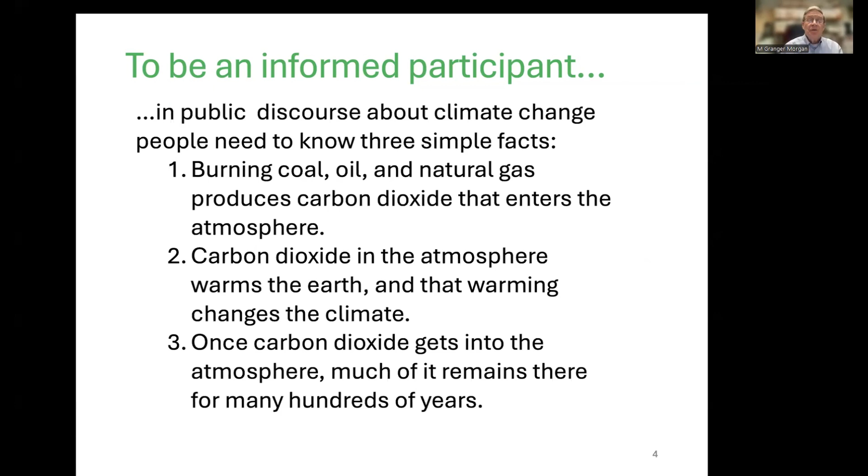Now, to be an informed participant in public discourse about climate change, people basically need to know just three simple facts. Burning coal, oil, and natural gas produces carbon dioxide that enters the atmosphere. Once carbon dioxide gets in the atmosphere, it warms the earth, and that warming changes the climate. And once carbon dioxide gets into the atmosphere, much of it remains there for many hundreds of years.

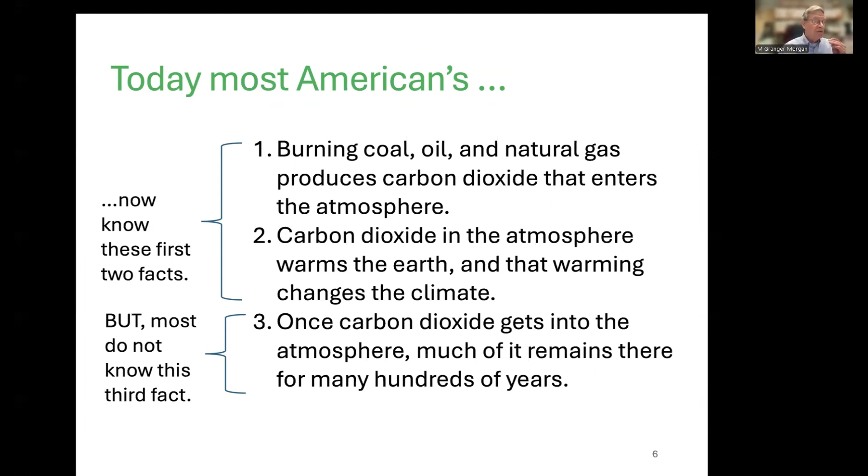Now, with a number of my social science colleagues, I first started studying what people know about climate and climate change about 30 years ago. And it turns out that now most Americans know those two first facts that I listed. But it also turns out that most Americans do not know this third fact, namely that once the carbon dioxide gets into the atmosphere, much of it stays there for many years.

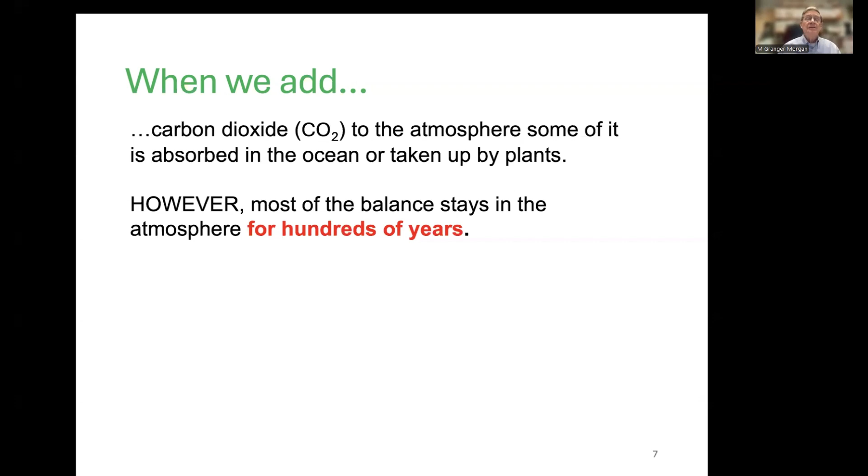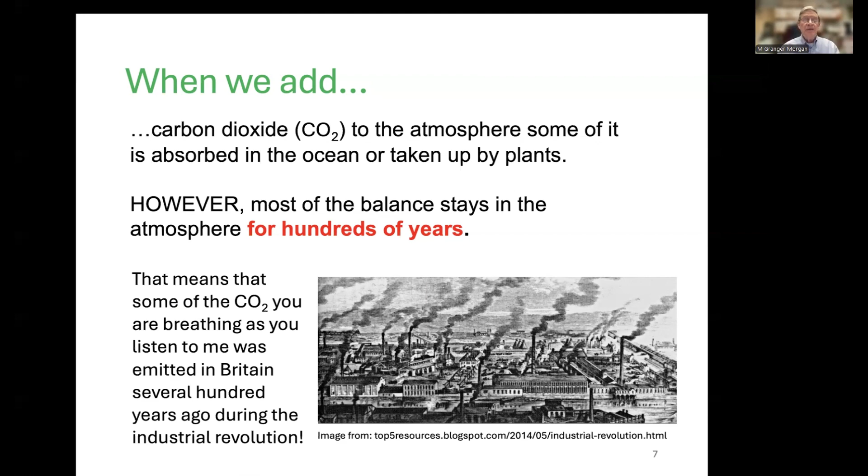So when we add carbon dioxide to the atmosphere, some of it gets absorbed in the ocean or is taken up by plants. But as I said, most of the balance stays in the atmosphere for hundreds of years, which means that some of the CO2 you are breathing, as you listen to me, was emitted in Britain several hundred years ago during the Industrial Revolution.

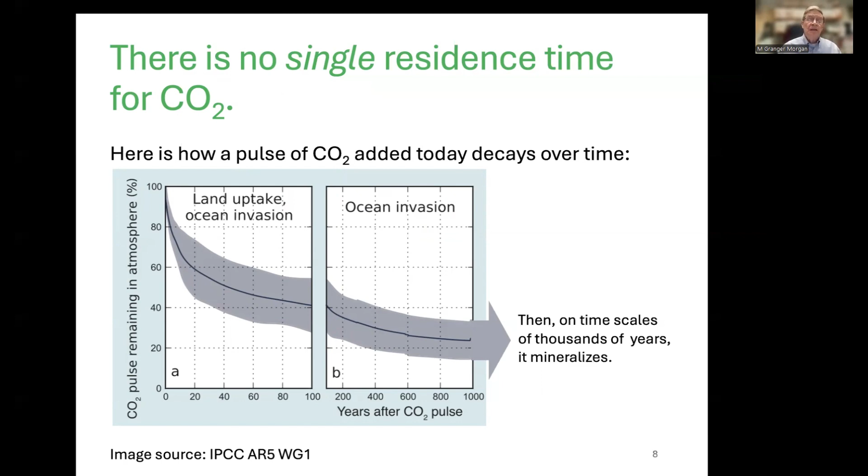So there's no single residence time for carbon dioxide. Here's a plot of how a pulse of CO2 added today decays over time. And you can see that after 100 years, it's down to maybe about 40%, but a lot of it is still around. Most people think that CO2 stays in the atmosphere about as long as conventional air pollution.

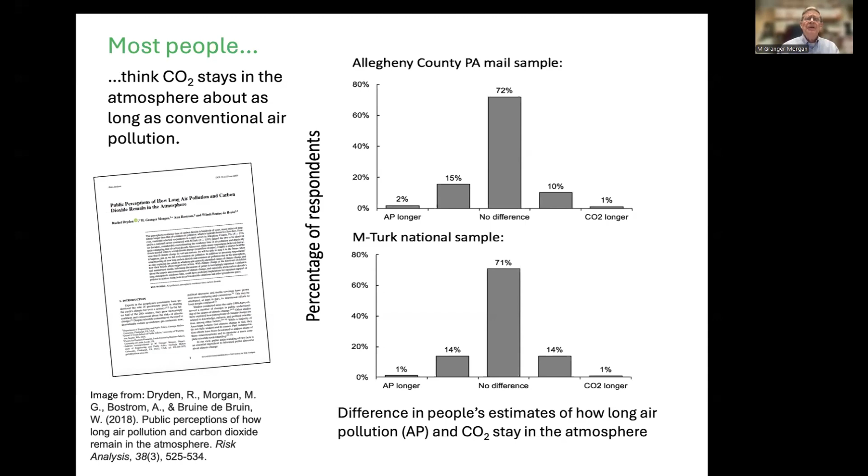To help you think about that, a simple bathtub model can help. Consider the figure on the left, which is the case for regular air pollution. I've got this tap, which is air pollution going into the atmosphere. The atmosphere is the bathtub. And in this case, there's a large drain, and it pretty much drains out at the same rate that I'm putting it in.

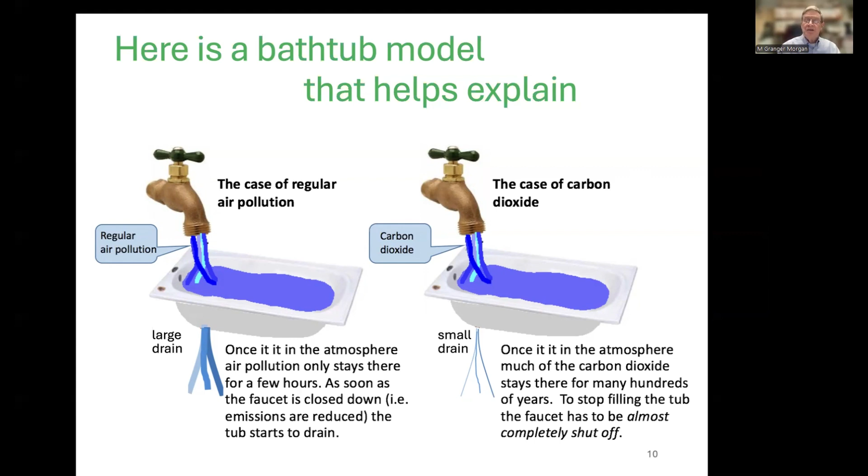The figure on the right, on the other hand, is the case of carbon dioxide. Still, we're putting a lot into the bathtub, but the drain, that is, the processes that can remove carbon dioxide from the atmosphere, are much slower. And to stop filling the tub, the faucet has to be almost completely turned off.

So here's the bottom line on that first part of the talk. We can argue about how fast we should reduce our emissions of carbon dioxide and other greenhouse gases, how best to make the trade-off between incurring inconvenience and cost today versus leaving a habitable world for our children tomorrow, but neither proceeding full steam ahead with business as usual, pretending there's no problem of climate change, which appears to be the new policy of the U.S. government, nor going along with policy because folks figure that in a few years, when things get really bad, we'll just fix the problem. Neither of those is going to work.

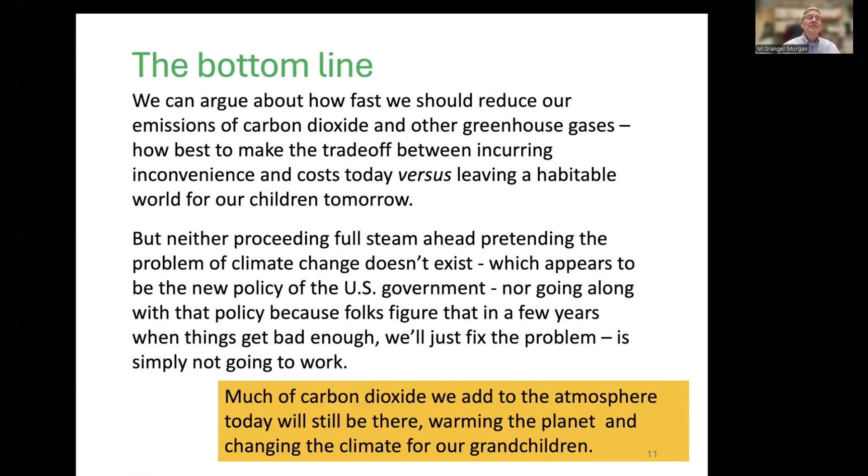All right, so let me move up. Oops, I'm going in the wrong direction. Sorry.

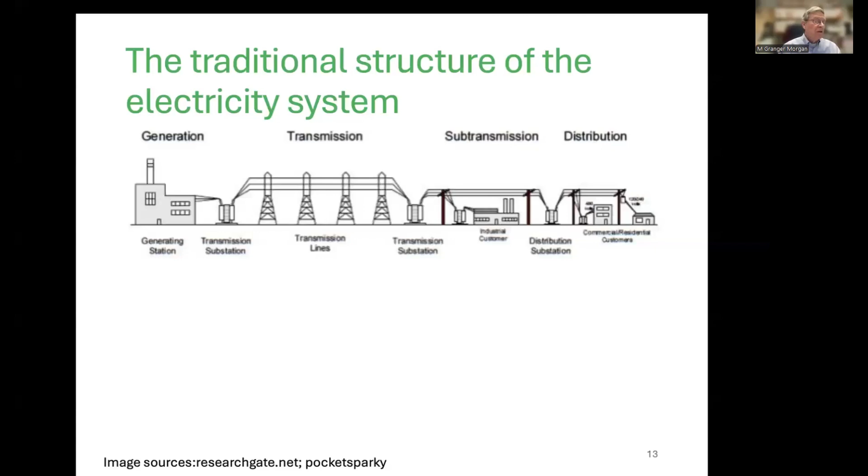So let me now say also a few background things about the electricity system. The traditional structure of the electricity system looks pretty much like this. We had large central plants. We moved power out across the countryside in high voltage transmission lines. We stepped the voltage down and distributed it to things like factories. We step it down further and distribute it to communities, and ultimately we step it down for use in our homes.

Three things to note. There are three conductors, that is three wires on these transmission lines, because we use three-phase alternating current. That's much more efficient for long distance transmission and for many heavy loads like big motors.

The second thing to note is that we use high voltage for long distance transmission because the amount of power that you move through a power line is roughly the product of the voltage and the current, but the losses go as the square of the current. So you want to move the power with low losses, which means you want to keep the current low, which means you want to keep the voltage high.

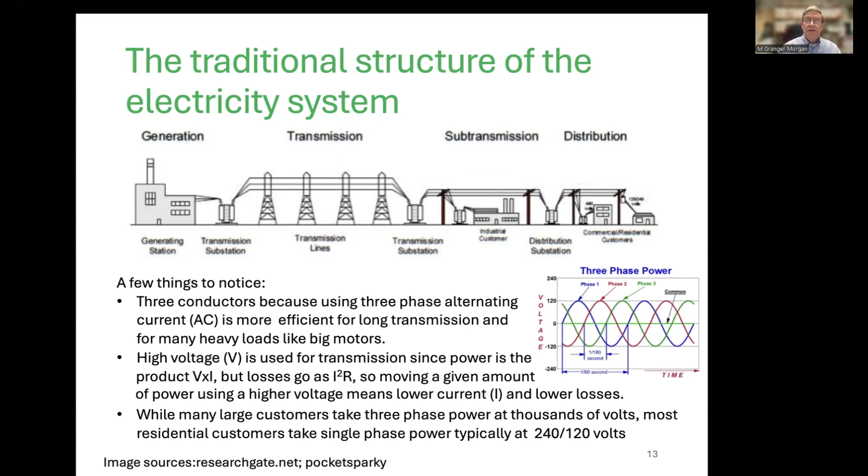And then finally, while many large customers take three-phase power at thousands of volts, most of us as residential customers take single-phase power, typically at 240 or 120 volts.

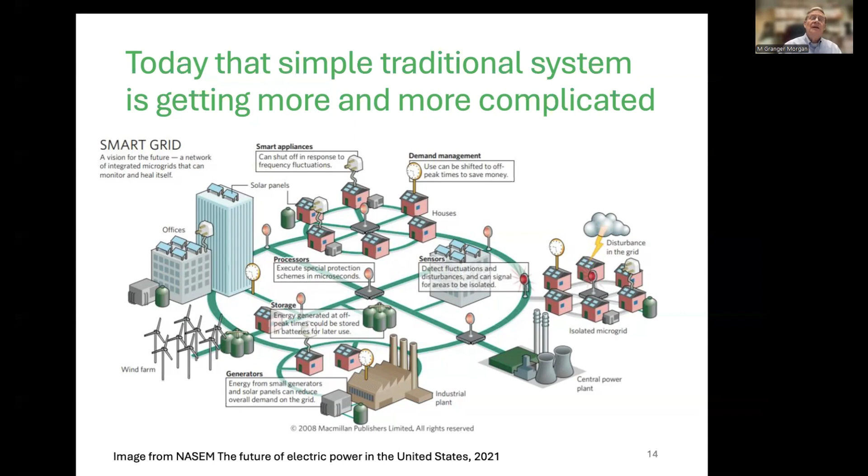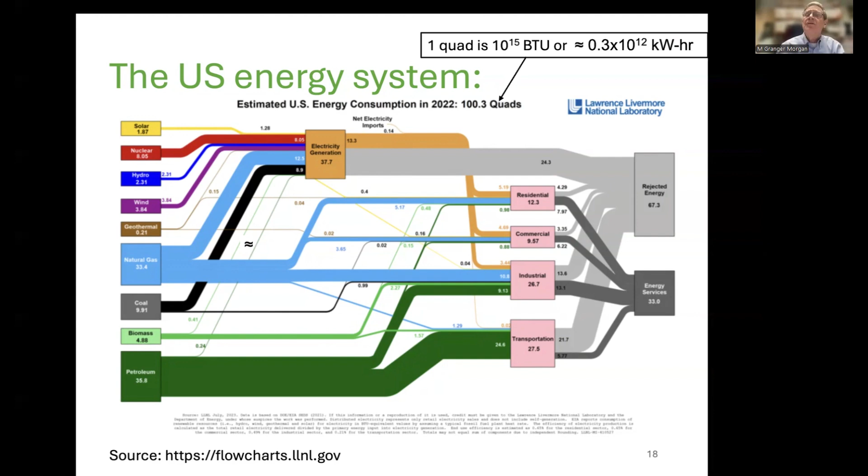Now, suppose I want to limit carbon dioxide emissions. Incidentally, these are all in quads, which are a funny unit, but basically there are three strategies. We can use more generation that doesn't produce CO2, things like wind and nuclear and solar. We can be careful to not let the CO2 get into the atmosphere when we burn fossil fuels. And we can use electricity that we generate more efficiently so we don't need as much of it. I'll talk first about that last one and then the others.

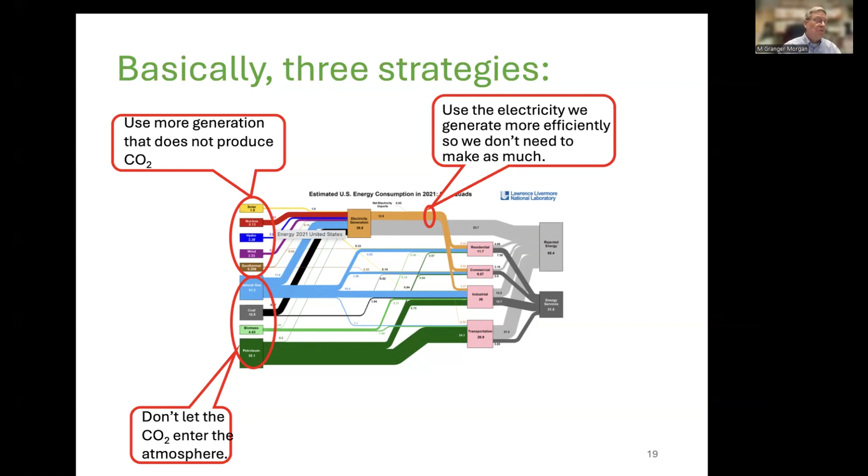Here, I'm going to show you 4 examples of using electricity more efficiently, and I'm going to spend the bulk of the time on this first plot.

This is a plot for refrigerators. The top dark curve is the size of refrigerators. So you can see refrigerators today are bigger than they ever were. The middle blue curve that goes up and then comes down is the amount of energy, the amount of electricity that refrigerators use. And you can see that beginning in the 70s, first because of standards implemented in California, and then because of national standards, the energy used to run a refrigerator has continued to drop.

And furthermore, the bottom lighter curve is the price of a refrigerator. And so you can see that today, or at least when this curve was done, but the situation continues today, as a result of regulation that says you can't market an energy inefficient refrigerator, refrigerators are larger, cost less, and use less energy than ever before.

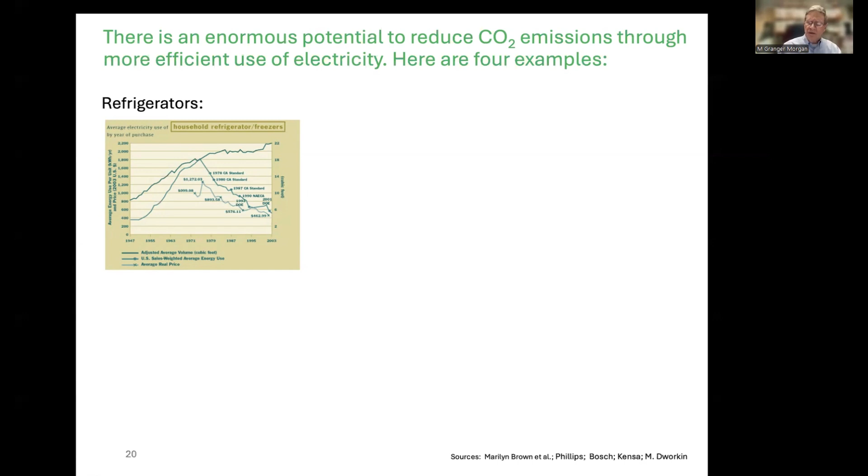There are other things that we can do as well to use electricity more efficiently. We can use heat pumps. We can convert to solid state lighting. Most of the country has now. And then there are strategies such as the system efficiency Vermont has implemented.

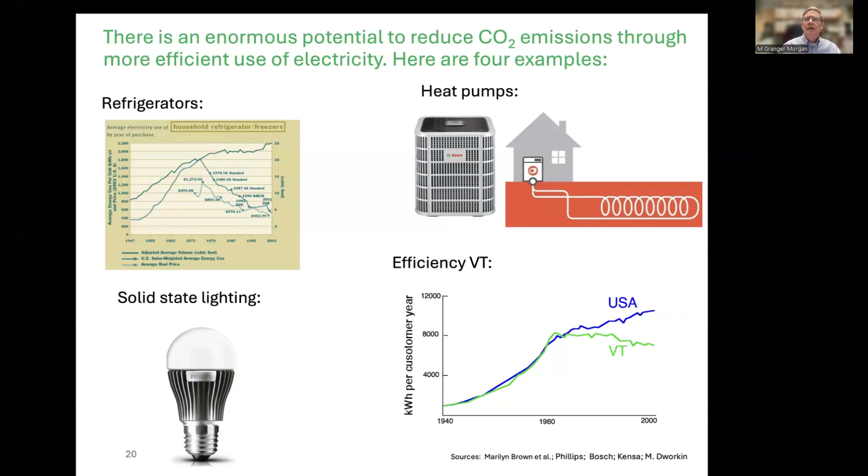Vermont, this is the kilowatt hours per customer year in Vermont. And for the US, it in recent years has been growing at sort of a linear rate. It's beginning to pick up a bit more now. The green curve, though, you can see for Vermont is because Vermont takes a few mils of price off each kilowatt hour sold and asks, how could we use this money to better improve the efficiency with which we use electricity in Vermont?

So here's how the U.S. generates its electricity today. You can see that up until the late 2000s, coal was the dominant source. But coal has been dropping off and natural gas has been picking up. That's largely driven by economics. Gas has really gotten quite cheap, as I'll say on the next slide. Nuclear has been running about 20%. It's actually dropping a little bit because our nuclear plants are getting old.

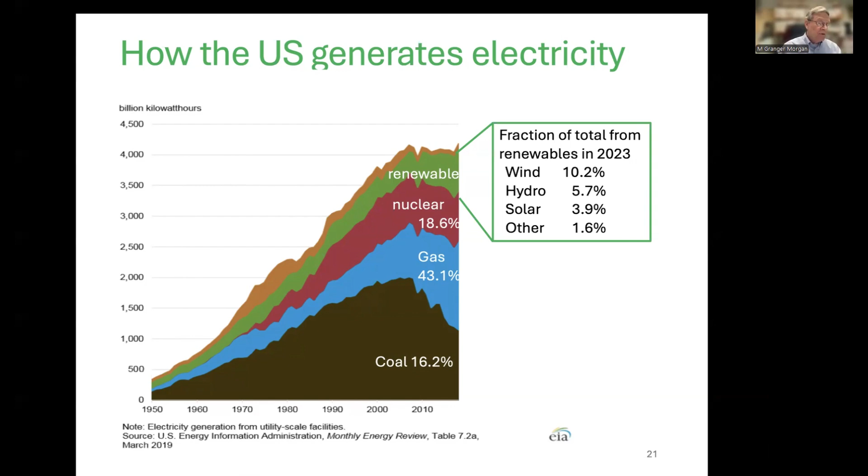And here's renewables. Wind is about 10% of total generation. Hydro is of the order of 6%. Solar has been growing, but it's still only about 4%. And so the switch to natural gas that I mentioned in the early 2000s occurred because of the so-called shale gas revolution. Gas prices fell dramatically. Producing electricity with gas produces only about half as much CO2 as using coal.

And so some have described that switch to gas as the bridge to a decarbonized electricity system, which is great. I mean, the fact that we've dropped the carbon intensity of electricity generation by roughly half is a wonderful development. But a bridge needs an abutment at the far end, and so far not much has been done to build that. We've got lots of coal and gas, and while wind and solar should play a much bigger role, we're not likely to be able to completely decarbonize the electricity system by just using renewables.

And that means we need to find ways to use gas and perhaps a bit of coal while not releasing carbon dioxide to the atmosphere. And there are basically three ways to do this. When you download these slides, you can look at them in greater detail. The top way basically says use the fuel in a power plant and then scrub the CO2 out of the exhaust stream of the plant.

Now, that's very energy inefficient because most of the exhaust that comes out of a power plant is nitrogen because the atmosphere is mainly nitrogen. And so there's not a whole lot of carbon dioxide in that exhaust stream. The concentration is low. So you really have to work hard to scrub the CO2 out of the exhaust stream. But we're doing it. It's in some plants, and I'll explain that in a moment.

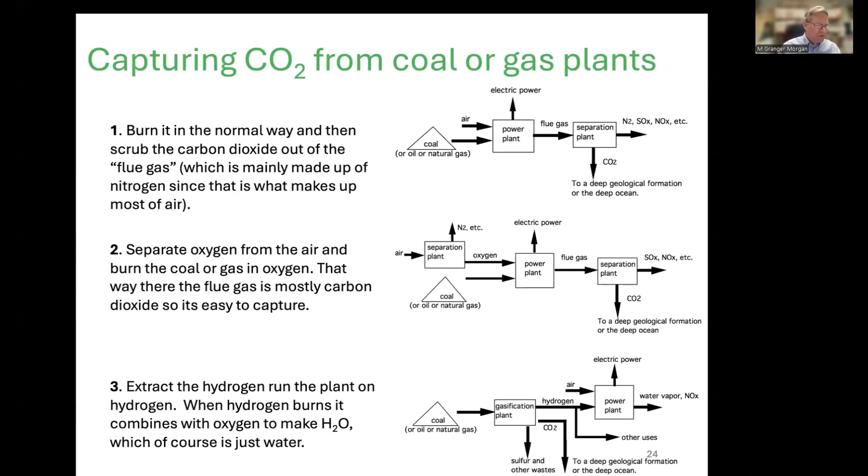The second thing you could do is you could simply break up the atmosphere composition and get pure oxygen. You do the separation before rather than after, and then burn the fossil fuel in pure oxygen. That means you get a much more concentrated stream of CO2 out the back end. And the third strategy, you gasify the fossil fuel, you make hydrogen, which of course, when you combust it with air, with oxygen, makes just water. You do have problems. You have to worry a bit about nitrogen pollutants. So these ideas are not just pie in the sky.

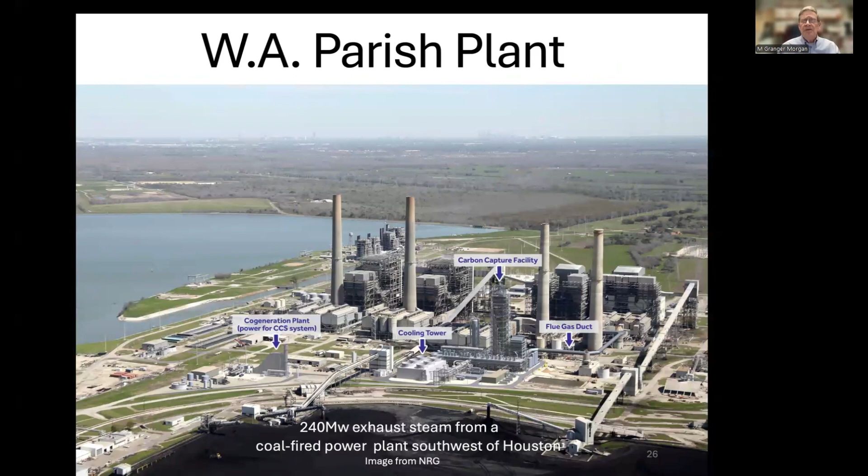Here's a power plant in Texas that's actually doing this. Once you've separated the carbon dioxide, of course, then you have to get rid of it. And basically, the strategy is to inject it into appropriate geologic formations where it will be permanently sequestered at depths of 1 kilometer or so. It rather quickly becomes trapped in the pores, so the risks of any escaping, if they're done properly, are really quite modest.

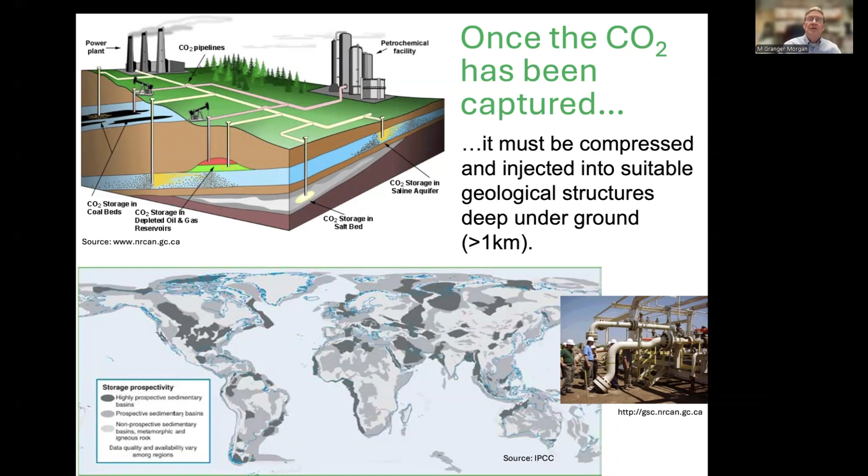And you can see that North America is very fortunate. Both we and the Canadians have quite a lot of appropriate geologic formations. Now, for a long time now, since 1996, in Norway, we've been doing this. The Norwegians passed a rule years ago that said, in your offshore operations that produce natural gas, you can't emit carbon dioxide. And so natural gas in the fields that the Norwegians extract from often is intermixed with carbon dioxide.

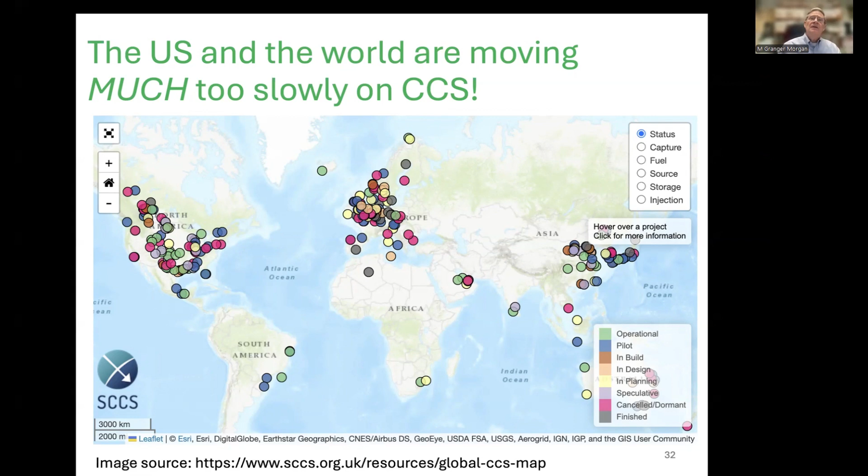Now, the U.S. and the world has been moving way too slowly on this. There are a few plants around. Many of them are pilots. But nevertheless, if we're going to use this technology, we really need to build more plants at commercial scale.

Now, today, about 40% of U.S. electricity is generated carbon-free. And as I said before, about 20%, actually it's been shrinking a little bit, comes from nuclear. I'll mention that in a moment. About 10% from wind and about 3% or 4% from solar. To fully decarbonize by 2035, we'll need to build about 55 gigawatts of new carbon-free electricity every year.

And although the U.S. built 60 gigawatts of natural gas generation per year in 1999 and 2000, it has not built more than 15 gigawatts of renewables in any single year. We could do it, but it's going to take a big push. So let me have one slide now on wind, one on solar, and one on nuclear.

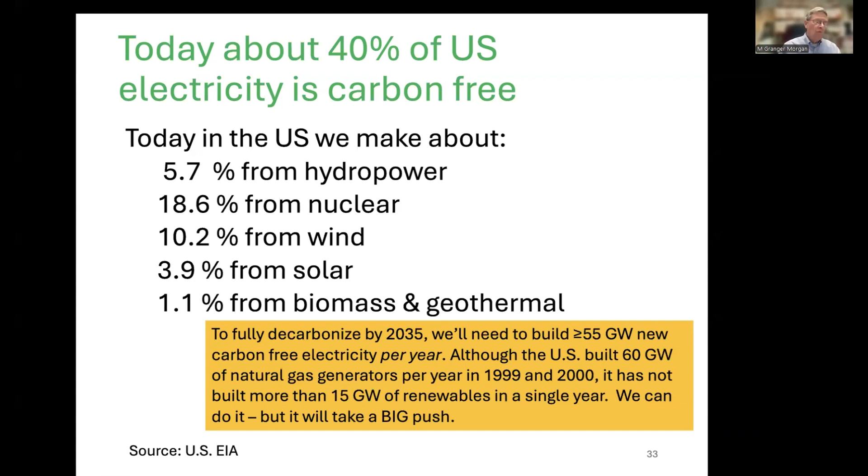If you happen to be in a place where you've got a lot of hydropower, hydroelectric dams, like the Pacific Northwest or Scandinavia, this can be handled. But elsewhere, it becomes a serious problem. And that's one reason that these days there's a lot of attention being paid to storage. The same is true for solar.

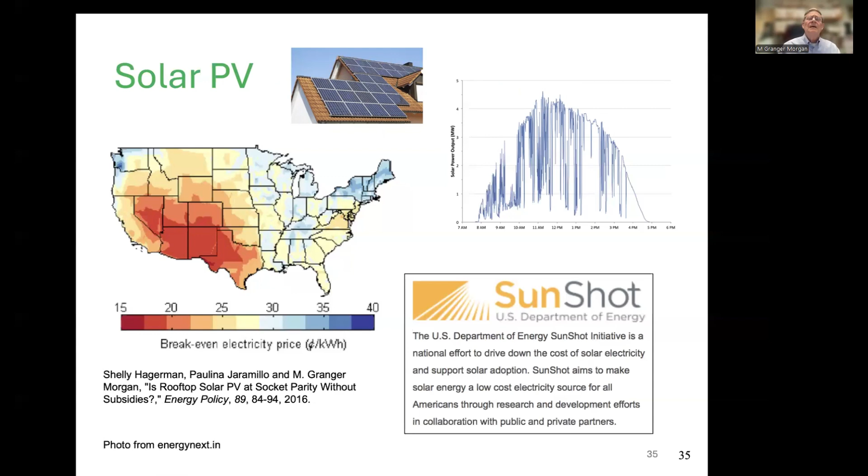One more slide just on nuclear. As the French have clearly shown, despite its various issues, nuclear power is capable of serving a nation's electricity needs without CO2 emission. And in the years past, about 88% of the electricity in France, EDF is Électricité de France, has been generated by nuclear plants.

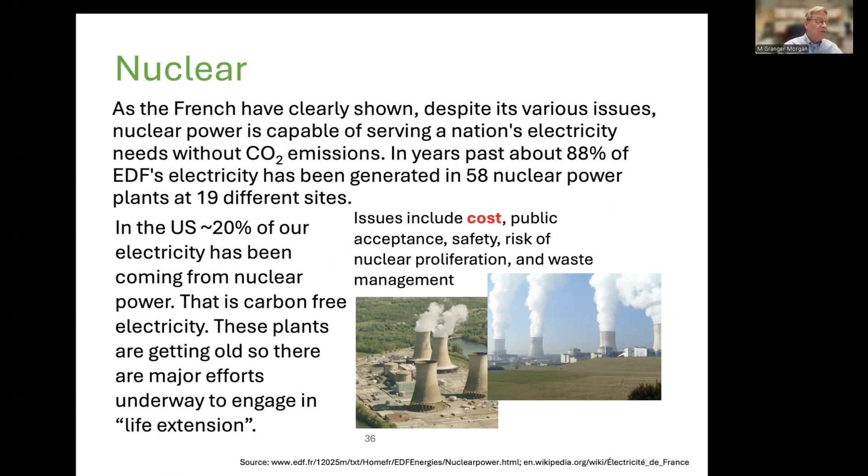In the U.S., as I've said several times, about 20% of our electricity has been coming from nuclear, and that's great, but these plants are getting old. And we are engaging in life extension, but there is a serious problem of cost control.

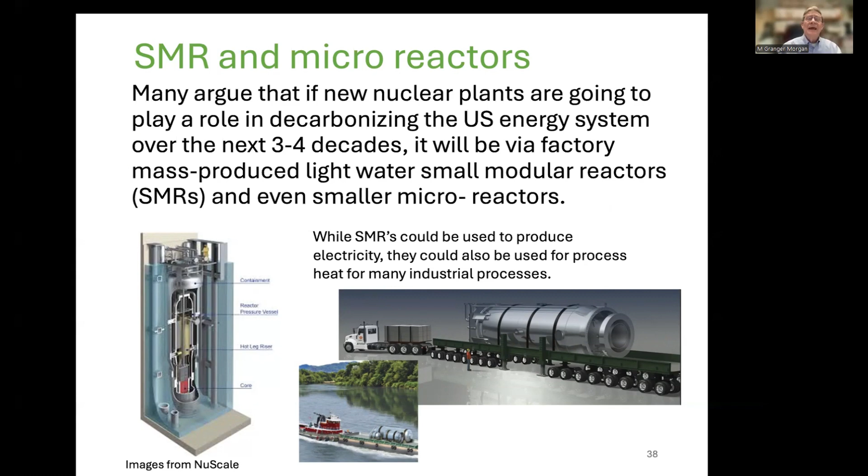And so the basic problem that nuclear has is that we have not figured out how to get... There's lots of enthusiasm these days about nuclear power, but until we can get cost control, I don't anticipate a lot of nuclear. Now, there are also the possibilities of small modular reactors and micro reactors. We've done quite a bit of work on these, and the same problem exists in this case.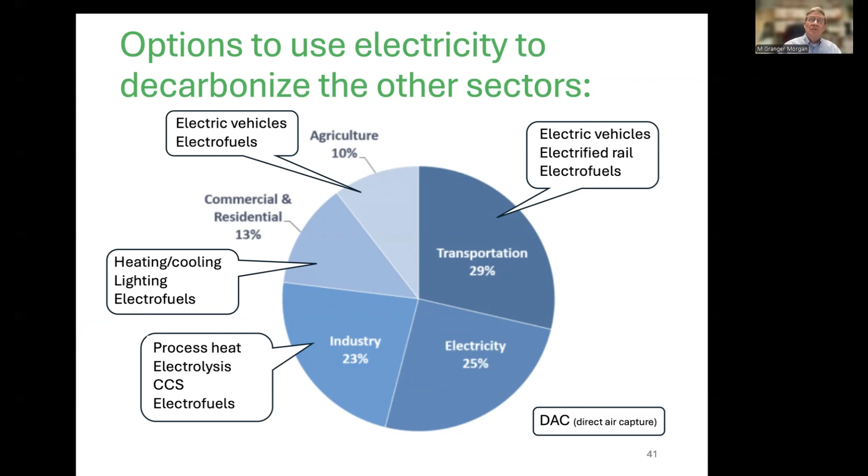I'm not going to take time to walk you through all these gory details, but basically the idea is if I have carbon-free electricity from wind or nuclear or something, and I split water, which is H2O, I can get hydrogen, and then I can use that in a variety of different ways in fuel cells, in combustion, and other things. And I can also, of course, then combine it with carbon dioxide that I take out of the air or out of the seawater and make a hydrocarbon fuel.

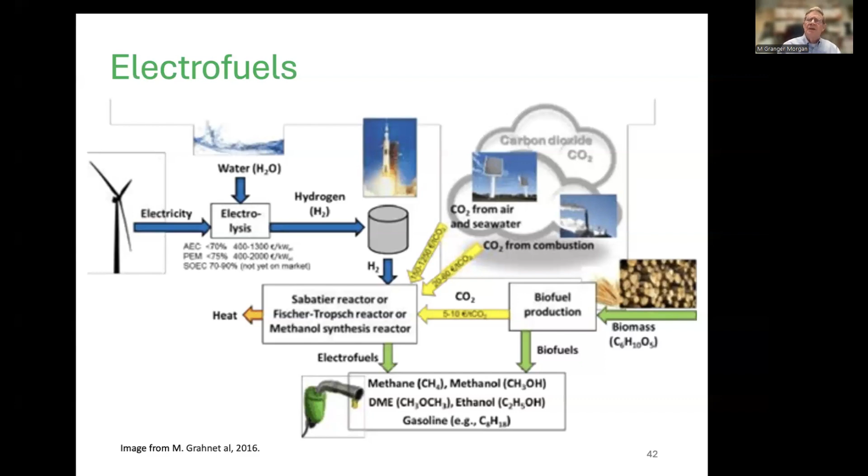That doesn't actually remove carbon dioxide from the atmosphere, but it is net zero in the sense that I'm taking CO2 out of the atmosphere, I'm combining it with hydrogen, I'm making a hydrocarbon fuel, burning it in a car or something like that, and the amount of CO2 in the atmosphere then doesn't go up, it stays unchanged.

So we all know about electric vehicles. The advantage of hybrids, especially once you get carbon-free fuels, is that you're not as vulnerable to large-scale power outages. I mean, if you're trying to evacuate the Carolina coast when a hurricane is coming and you got a whole bunch of stranded electric vehicles because they've run out of battery storage, it's much easier to dump a bit of fuel into a hybrid car than it is to recharge the battery in an electric car.

Progress has been slower for heavy freight, but there are prototype systems for heavy trucks that use electricity. And for ocean shipping, which we'll talk a bit more about in a minute, I have two examples. These are both ships run by the Norwegian line Hurtigruten. The one on the left is a diesel-powered vessel, but it has a large set of storage batteries, so the diesels can run at a steady speed and be much more efficient. And when you need surge, you take the energy out of the batteries rather than

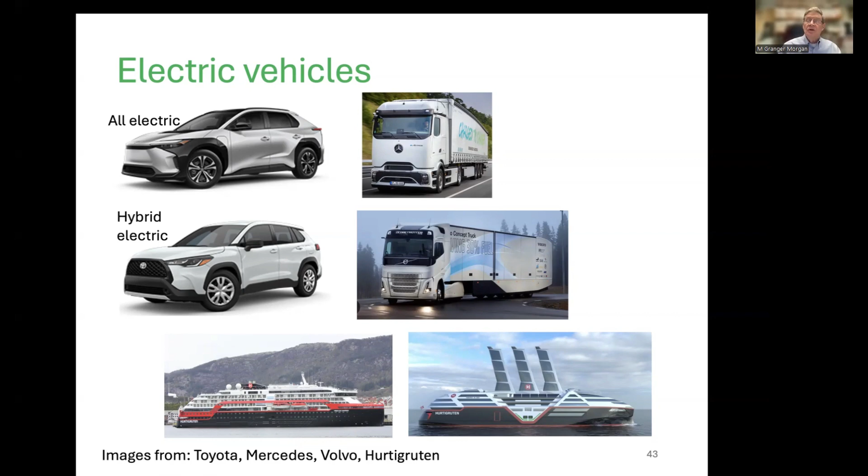throttling up the diesels. The ship on the right, those are solar sails up on the top, that Hurtigruten is working on developing, would actually be completely CO2 neutral, non-emitting. Electrifying rail, as I'll show you in a few minutes, is a whole lot less emitting if the electricity comes from some source that isn't producing carbon dioxide to the atmosphere.

Rail is vastly more energy efficient than trucks, and so to the extent that you can move heavy freight off of trucks and onto rail, so-called intermodal, that makes an enormous difference. Let me say one slide on heating and cooling, and then move on to industry, and then finally wrap up.

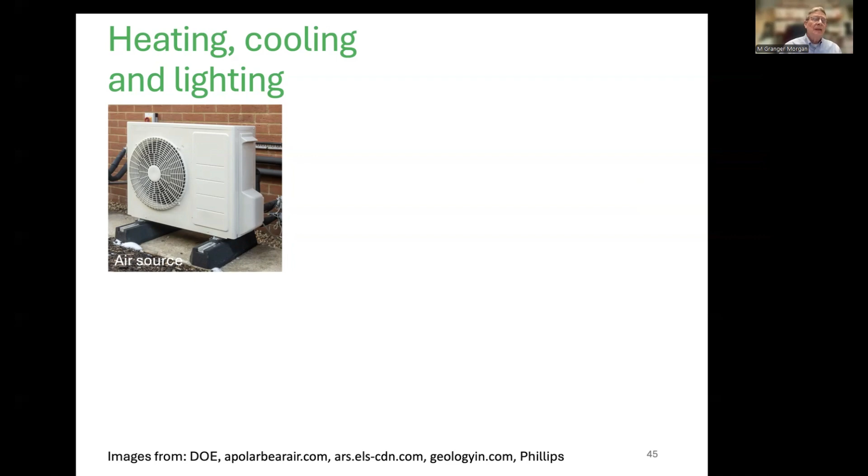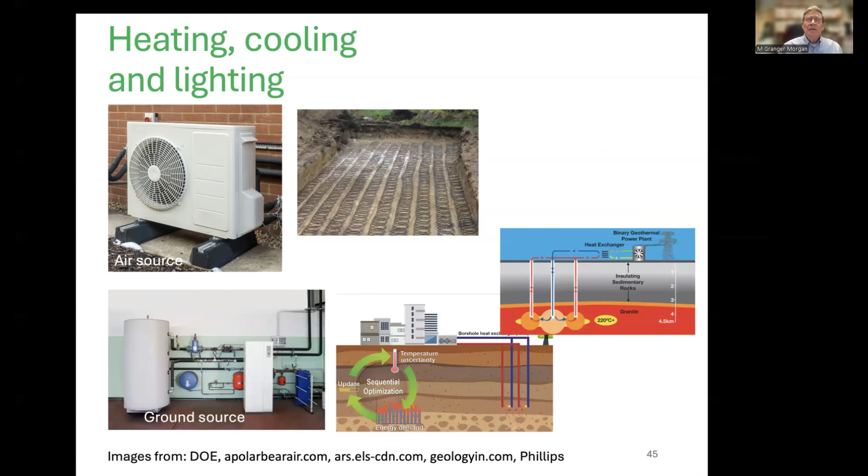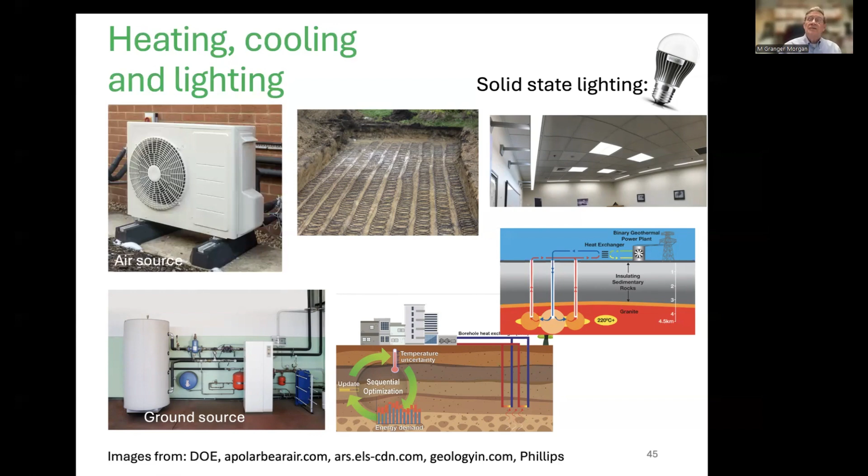You all know about air source heat pumps, but ground source heat pumps are getting much, much better, and deep ground source heat pumps are even more promising. Not too much of this going on here, but in Europe there is already quite a bit. And then, of course, we already mentioned solid state lighting. Solid state lighting has now made a big impact in terms of reducing the waste energy from illumination.

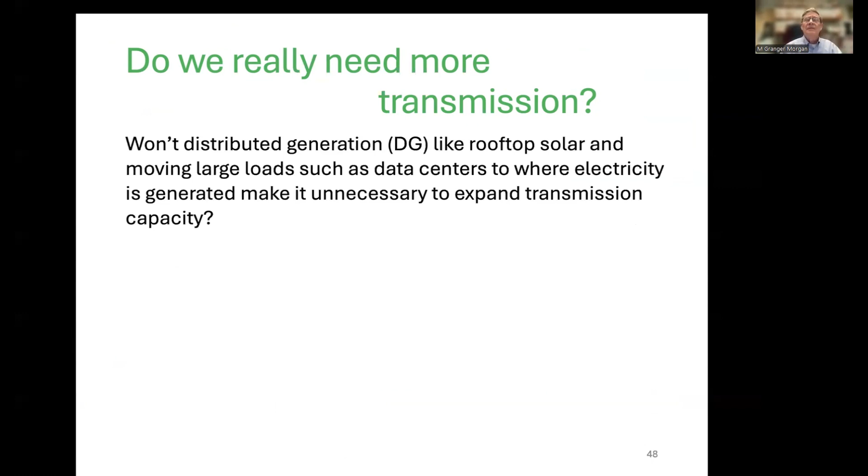All right, that brings us to the final chunk of this talk. The need to expand electric power transmission capacity, and finally, a few efforts that we're undertaking to address that problem. You might first ask yourself, do we really need more transmission? I mean, you said earlier, we got all these rooftop solar and other things. Can't we just do away with transmission? And the answer is, unfortunately, no.

Rooftop solar and distributed resources will help, but we still need to move power to where the loads are, from things like wind farms in the Midwest or offshore wind platforms, from solar in the Southwest, from hydroelectric dams in Canada and in other remote locations. And we also need to assure the continued system resilience. That is, when we have a hurricane or something, we need enough capacity to make sure we can move power from places where we've got it to places where we need it to keep the power system operating.

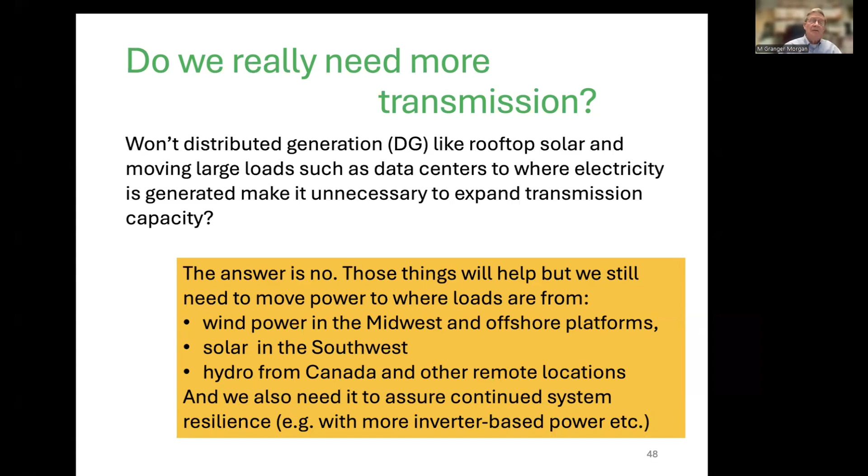But we face a logjam. It arises from public opposition and legal, regulatory, and other constraints, including the incentives faced by utilities, that makes it difficult, often even impossible, to move clean power from locations where it's produced to the locations where it's needed, while assuring that the power system remains resilient.

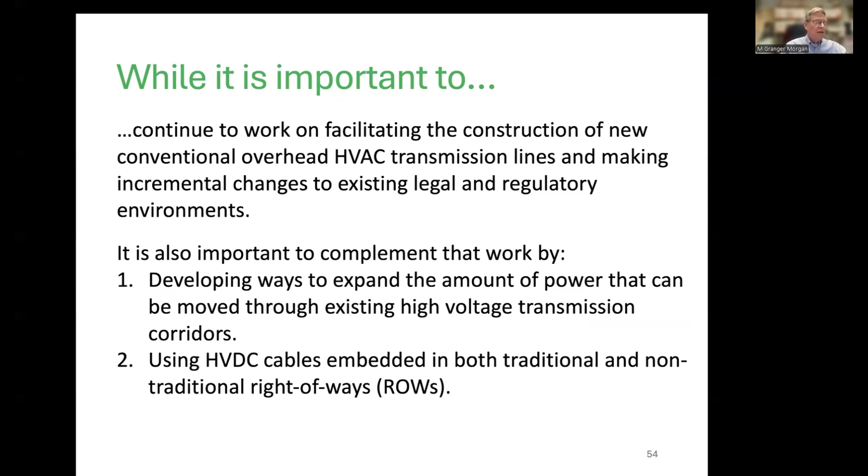While it's important to continue to work on facilitating the construction of new conventional overhead high voltage AC transmission lines, we think it's also important to complement that work by doing two things: developing ways to expand the amount of power that can be moved through existing transmission corridors, and using high voltage DC cables embedded in both traditional and non-traditional rights of way. I've got a slide on each of these, and then we're going to wrap up.

More power through existing rights of way. Well, we gather a whole lot of data these days from power lines. We're not using it as effectively as we can. By making greater use of it, we can up the capacity. We can upgrade the capacity of existing high voltage AC lines by, for example, converting the conductors to things that don't sag when they get heated up, so you can run more current through them.